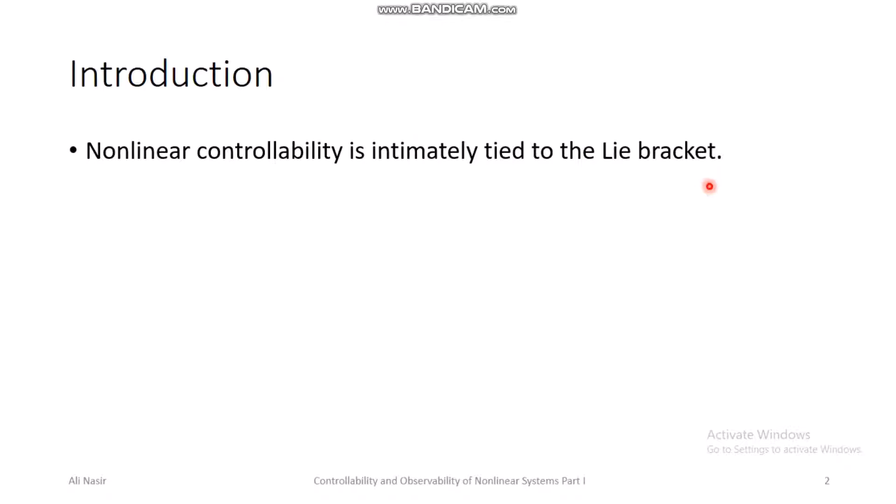Today we are going to discuss controllability and observability for nonlinear systems, and let's get started. The controllability of nonlinear systems is tied to the concept of Lie brackets. Before we discuss controllability of nonlinear systems, we shall go through this concept of Lie brackets and see how a Lie bracket is defined.

Lie bracket can be thought of as a derivative of a vector field with respect to another vector field. The exact definition of Lie bracket would come later on in this lecture, but the concept is that it is a vector field, the derivative of a vector field with respect to another vector field.

Nonlinear observability is tied to the concept of Lie derivatives. A Lie derivative is basically the derivative of a scalar function along a vector field. We shall see what Lie derivative is and how we define it before we discuss the concept of observability for nonlinear systems.

The whole discussion of controllability and observability will span more than one session. In this session we shall be discussing only the controllability part, and in the next session we shall discuss observability for nonlinear systems.

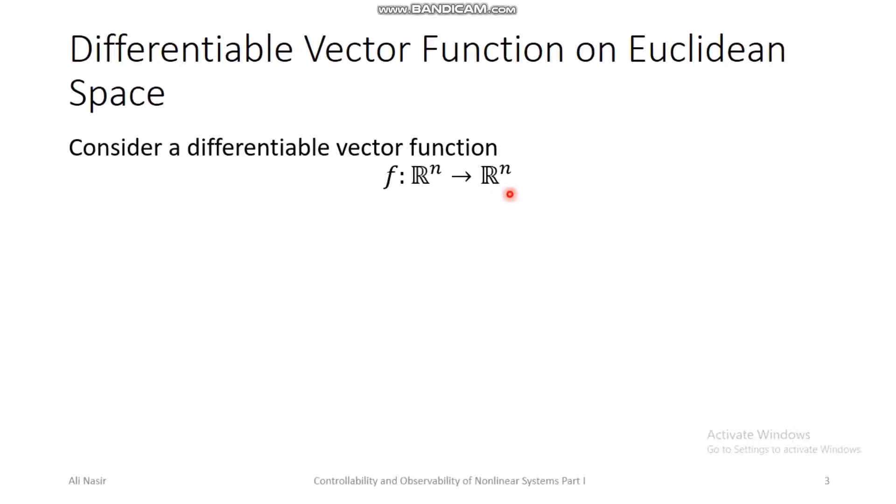First, let's look at a differentiable vector function on Euclidean space. Consider a differentiable vector function f, which is a function from Rn to Rn, meaning f operates on an n-dimensional vector, and the result of applying f to an n-dimensional vector is also an n-dimensional vector. Such a function forms a vector field over a set of points x belonging to Rn.

I am not going to go over the definition of a vector field in this section. You can look at it in the lecture notes I have provided regarding the first couple of lectures of nonlinear control systems, and you can also refer to the definition of vector field using online search. It's a pretty simple concept.

Basically it says that whenever you add these types of functions, the result of the addition should also be the same type of function. So vector addition and scalar multiplication does not alter the class of functions. If a function from Rn to Rn is added to another function from Rn to Rn, and the result of the addition is yet another function from Rn to Rn, then this is one of the requirements of a function belonging to or forming a vector field.

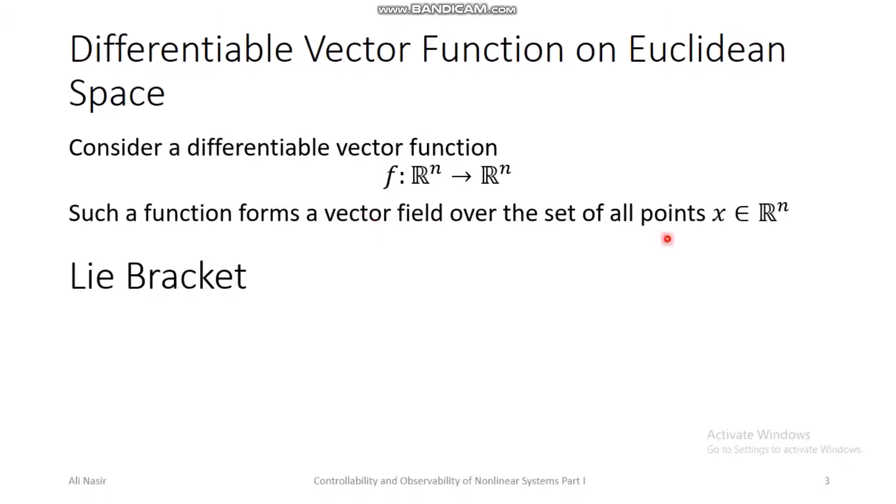So what is a Lie bracket? Once you understand that this function f forms a vector field over the n-dimensional Euclidean space, consider two vector fields f(x) and g(x) on Rn. Then the Lie bracket operation generates a new vector field which is defined by f comma g.

This is like a bracket notation, and it is defined by the partial derivative of g with respect to x multiplied by f of x, minus the partial derivative of f with respect to x multiplied by g of x.

This definition is not very complicated. You have two vector functions of x, and you take the derivative. The derivative of a vector with respect to another vector is a Jacobian matrix. So you calculate the Jacobian matrix of g with respect to x and multiply this Jacobian matrix with the vector f of x—matrix multiplied by vector gives a vector.

Minus another Jacobian of f with respect to x multiplied by g of x, which will also be a vector. If you subtract one vector from another, the result is still a vector, and this vector will be a function of x belonging to this class of functions. So it will still be a vector field, a function belonging to the same vector field.

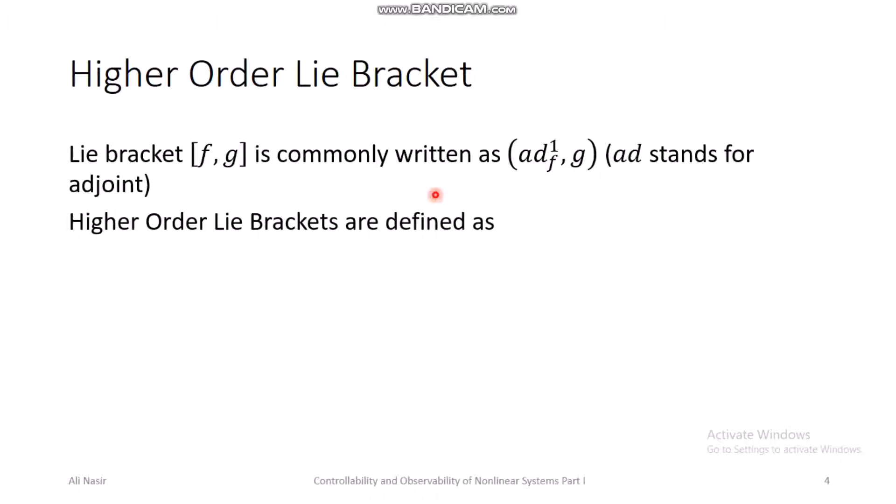For example, before I go into higher order Lie brackets, I want to let you know that this bracket of f comma g can also be written as the adjoint of f with respect to g, where AD stands for adjoint. If you look at higher order Lie brackets, the zeroth adjoint of f with respect to g is g itself.

The first adjoint of f with respect to g is the Lie bracket f comma g, which we defined in the previous slide. Then the second adjoint would be the adjoint of f with respect to the first adjoint of f with respect to g.

So this will be f, Lie bracket of f comma g. If you take the Lie bracket of this thing, that will be a second order Lie bracket, and you can continue in this manner up to whatever order k you want. That will be the Lie bracket of f with the Lie bracket of k minus 1 adjoint of f with respect to g. So in this way one can define the higher order Lie brackets, and we will also look at some examples by the end of this lecture.

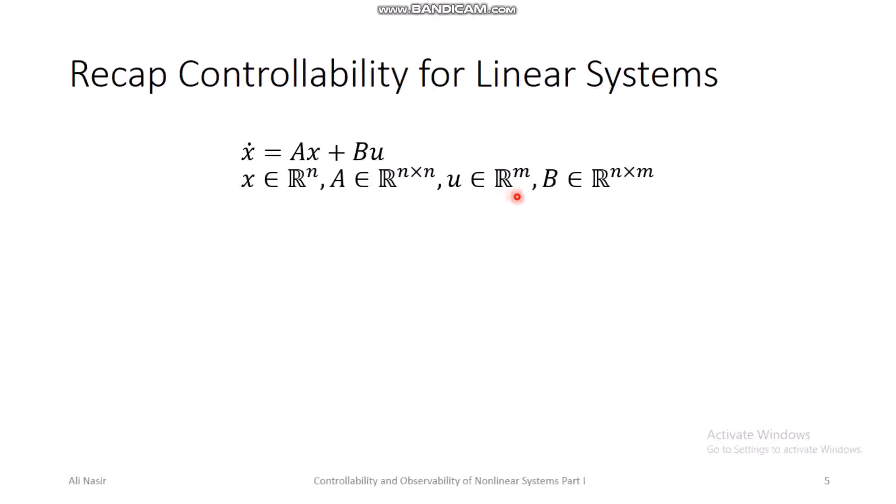Now that we have discussed what the Lie bracket is and how we define it, we can start our discussion on controllability. But before discussing controllability for nonlinear systems, I want to recap controllability for linear systems. We already know that for a linear system of the form x dot equals ax plus bu, where x belongs to Rn, a belongs to Rn cross n, u is an m cross 1 vector in general for multiple input systems, and b is Rn cross m.

For this type of system, we have a controllability matrix Q: b, ab, a squared b, and so on up to a to the n minus 1 times b. So this is n rows. This is the first m columns of the Q matrix, then the next m columns, then the next m columns. So the number of columns in the Q matrix in general is n multiplied by m.

But for controllability, all we need is for Q to have full rank. The number of rows in Q is n, and n is smaller than n multiplied by m. So the highest possible rank of the Q matrix would be the minimum of the number of rows and the number of columns. In this case, the number of rows is less than the number of columns, so the highest possible rank of Q could be equal to the number of rows, which is n.

So if Q has rank n, then we would say that this system is controllable, and if Q has rank less than n, then we would say this system is not controllable. So this is controllability for linear time invariant systems.

Next I want to rearrange a few things. I want to define a bit of new notation for these linear systems, so that when we transition to nonlinear systems, it might help in understanding the concept of controllability for nonlinear systems.

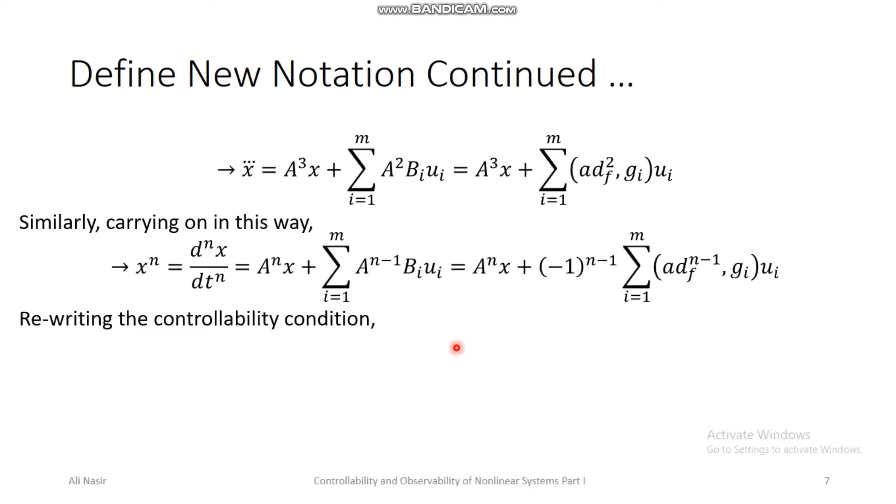So what is the purpose of writing all of this? The only purpose is to show you that the span of the higher order derivatives of x has something to do with the Lie brackets. So if we write the controllability condition for x dot equal ax plus bu in terms of fx and gx and Lie brackets, then it will turn out to be something like this.

So the Q matrix starts with B, then there is A into B, which is the first Lie bracket. So remember, the first Lie bracket is A into B.

The plus or minus sign does not change the rank of the Q matrix, as you can know from matrix theory. And the higher order terms, like the n minus 1 Lie bracket of f with respect to G1 up to Gm, would correspond to A to the power n minus 1 times B.

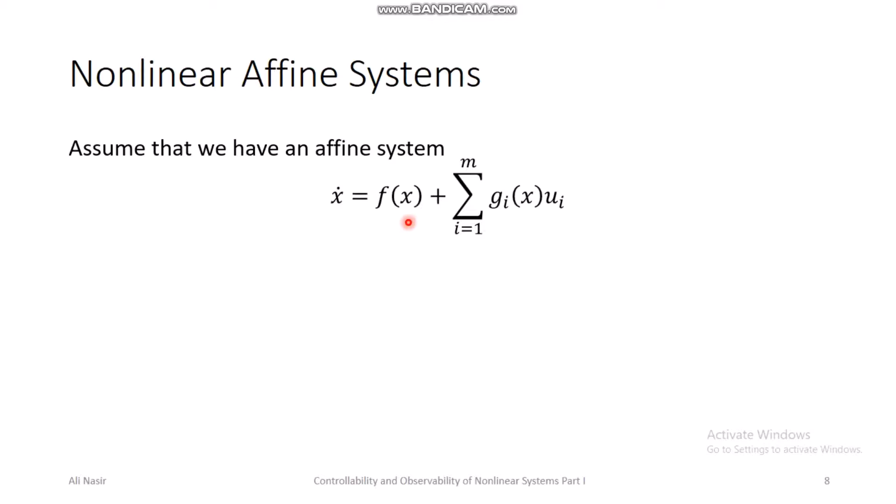You can look at Q and see that this is the same as the linear case, but the difference is that here G1, G2, G3 would not necessarily be constant column vectors. Those would in general be nonlinear vector functions of x.

So there will be G1, G2, up to Gm, and then there are Lie brackets between all possible pairs of G: Lie bracket of G1 with G2, G1 with G3, G1 with G4, and so on. Then there are higher order Lie brackets of G with respect to other G's. And then there are Lie brackets of f with respect to G, and higher order Lie brackets of f with respect to all the G's, and it keeps on going.

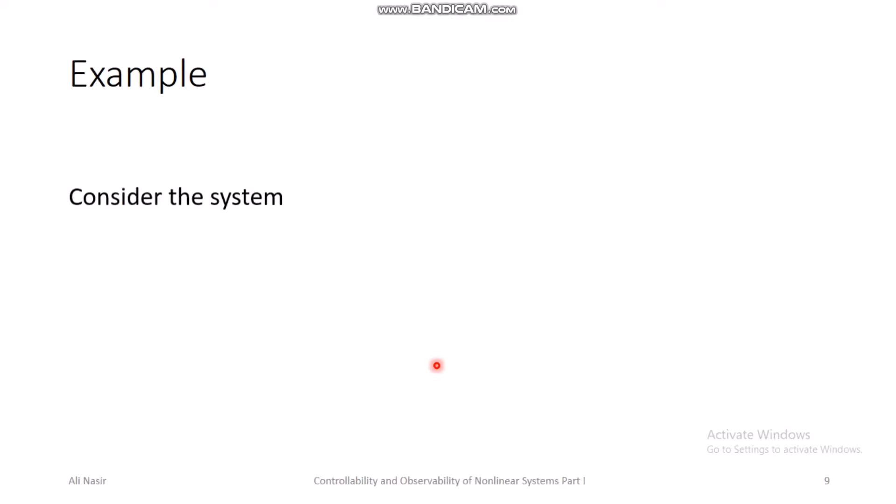Okay, so let's look at some examples. Consider this third order system, a 3-state system.

You have x1 dot equals sine of psi into u1, x2 dot equals cos of psi u1, and psi dot equals u2. So this is you can think of it as a robotic arm, the joint of a robotic arm, and there are two inputs. One input is going to rotate the xy coordinates of the arm, and this could be the torque related equation.

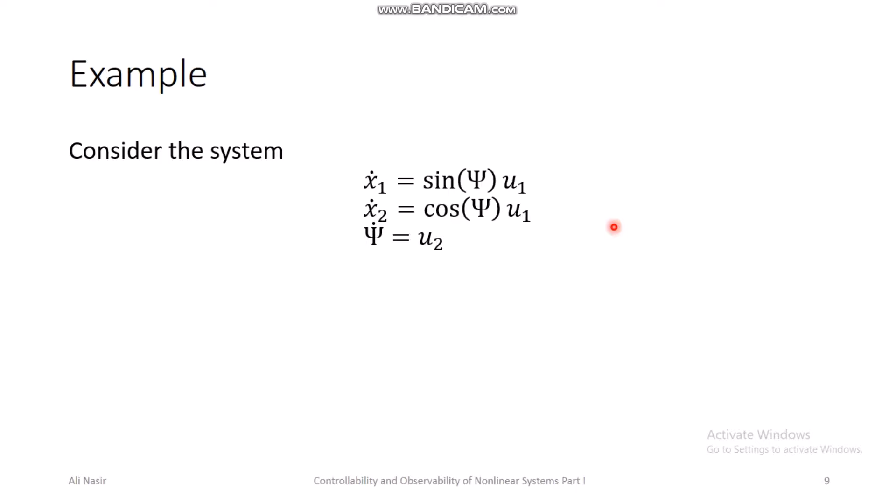So this system is basically of the form x dot equals f of x plus g1 times u1 plus g2 times u2. How is this system of this form? Let's see. Consider x to be a vector of x1, x2 and psi. So this whole thing is x dot, and f of x would be 0, 0, 0. So we have x dot equals 0 plus g1 times u1 plus g2 times u2, where g1 would be sine of psi, cos of psi and 0. In the x1 dot and x2 dot cases, g2 is 0. But in x3 dot, g2 would be 1, whereas g1 would be 0. So you can relate this form with the given example.

So given this system where we have x like this, f of x equals 0, g1 and g2, how do we form the Q matrix? It's very easy. You just have g1 and g2, and then the bracket between g1 and g2. You don't need any other higher order brackets because you only need Q to be of rank 3. So if these three are enough to prove that Q has rank 3, then we don't need higher order brackets of g1 and g2. But if these three are not enough, then we can try to look into higher order brackets and see if there is any possibility. In general you will know this without much effort.

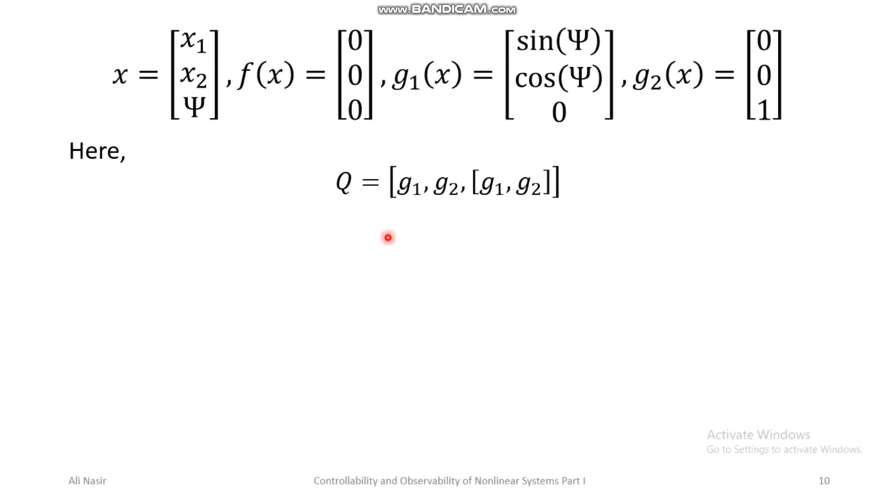So let's see what Q turns out to be. We already know g1 and g2. This is the first column of Q, this is the second column of Q, and we are looking for the third column of Q, which is the Lie bracket between g1 and g2. The definition of Lie bracket would be partial g2 by partial x into g1 minus partial g1 by partial x into g2.

You can see that whatever the value of psi you plug in, this matrix will always have rank 3. So Q matrix has rank 3 for all x, which means that at every point x0 it is accessible, and so this system is controllable. We already saw that f of x in this case is 0, so its accessibility would imply the controllability. So this was the first example where the nonlinear system turned out to be controllable.

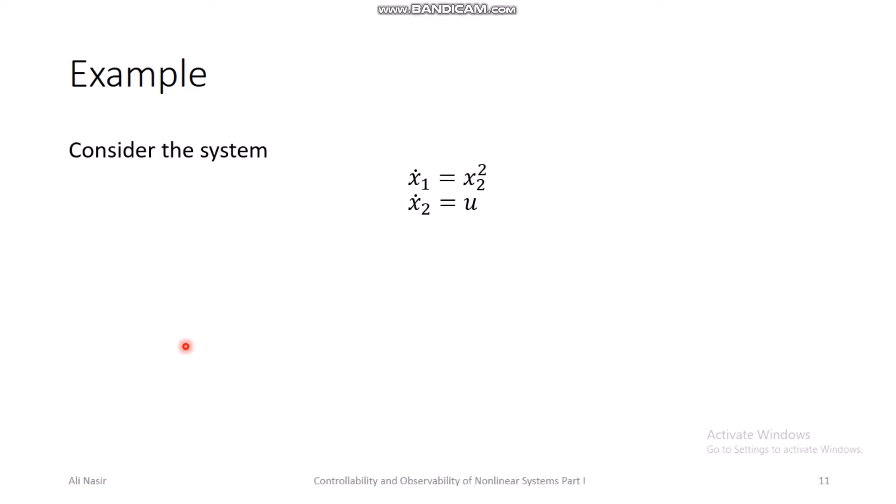Let's look at another example. Consider the second order system where x1 dot equals x2 square and x2 dot equals u. In this case f of x would be x2 square and 0, and g would be 0 and 1. So there's only one g, this is a single input system, so we can see that the Q matrix would become g and the bracket of f comma g.

We don't need to use the higher order brackets of f comma g unless these two brackets fail to get Q a rank of 2. If these fail, or in general, you will see that the higher order brackets will turn out to be 0 as well. So Q will almost never have an infinite number of columns, only as many columns as the size of the state space would suffice to determine the controllability or accessibility. We already know g here, it is 0, 1, this is the first column of Q.

We only need to calculate f, g, which you can easily calculate using the definition of Lie bracket, and it will turn out to be minus 2x2 and 0.

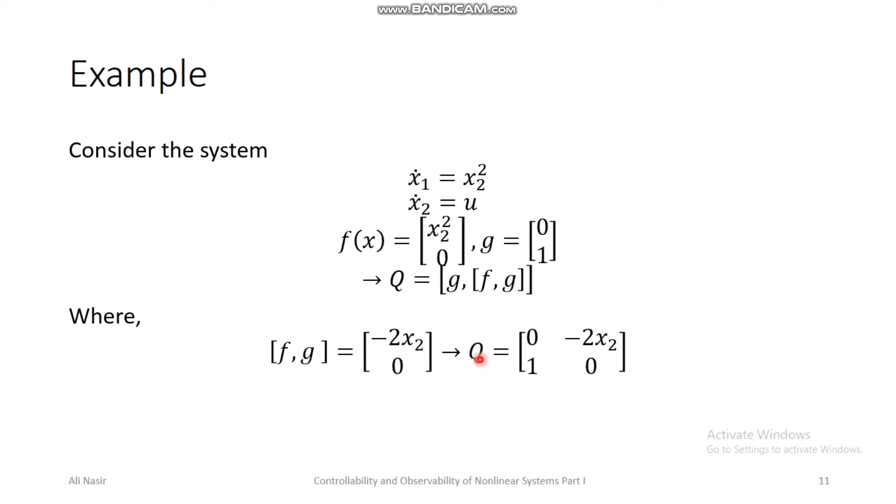If you plug it right here, this matrix would be rank 2 if x2 is non-zero. If x2 is 0, this whole column will become 0 and the rank of Q will drop to 1. And even if you use higher brackets of f, g, this condition will not change.

So Q will always lose its rank at x2 equals 0. This means that Q has rank 2 everywhere except for the points with x2 equal to 0, and x2 is 0 along the x1 axis. So along the whole x1 axis your system is not accessible. Therefore the system is accessible everywhere except for the points on the x1 axis.

So this was another example where the system is not controllable, but it is accessible at points other than the x1 axis. So I hope that these examples and the description of the nonlinear controllability was useful in understanding the concept of controllability for nonlinear systems.

In the end, I just want to give one remark: if we linearize a nonlinear system about some point x0 and the linearization is controllable, then the original nonlinear system is accessible at x0. And we already saw in earlier lectures that if the linearization of a nonlinear system around an equilibrium point is controllable, then it is possible to design a feedback control law for the original nonlinear control system.

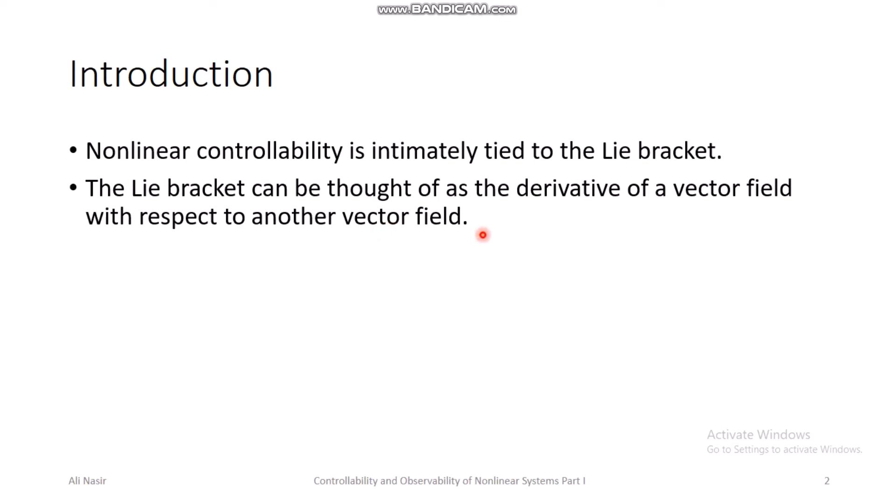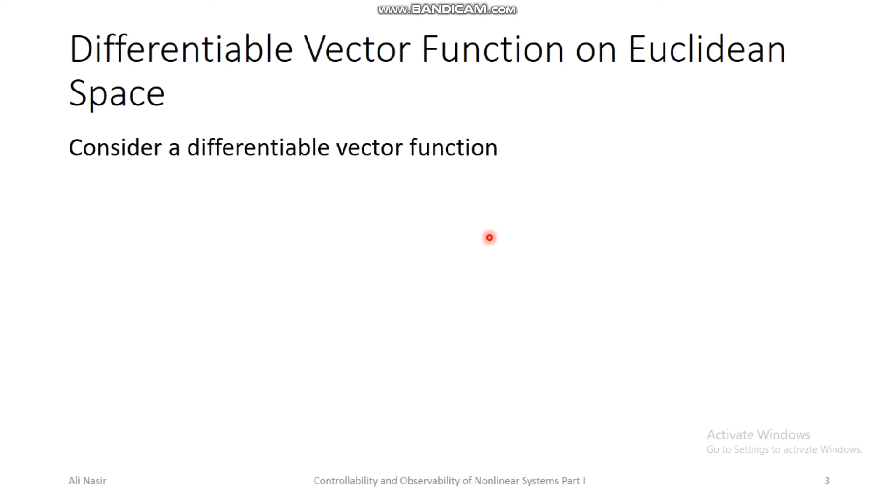Nonlinear observability, we shall discuss that next time. Then we consider the vector field f of x in n-dimensional space, and this is the Lie bracket, which is sort of similar to a derivative of a vector field with respect to another vector field. So derivative of a vector with respect to a vector is a Jacobian.

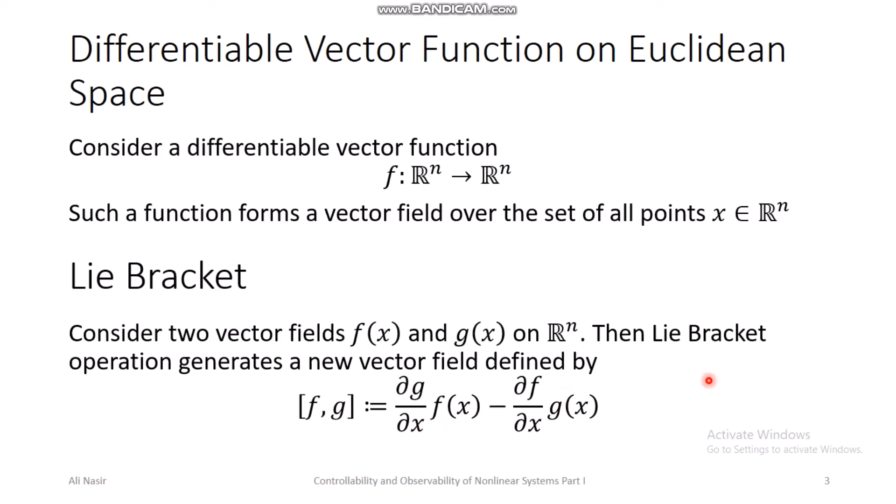So higher order Lie bracket would be similar to the Lie bracket. You take a Lie bracket and take the bracket of a bracket. So you take the bracket of f with respect to the bracket, then this will be the second order bracket. So if we take a bracket with respect to a k minus 1 order bracket, then that will be the kth order bracket.

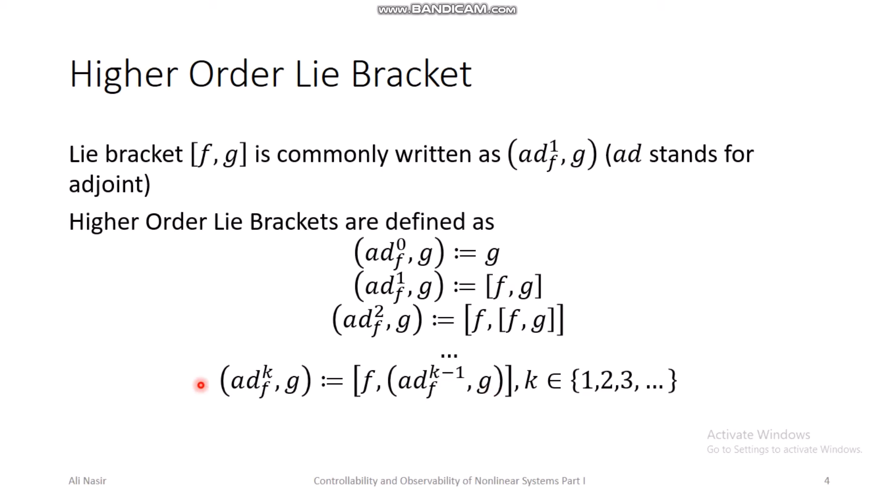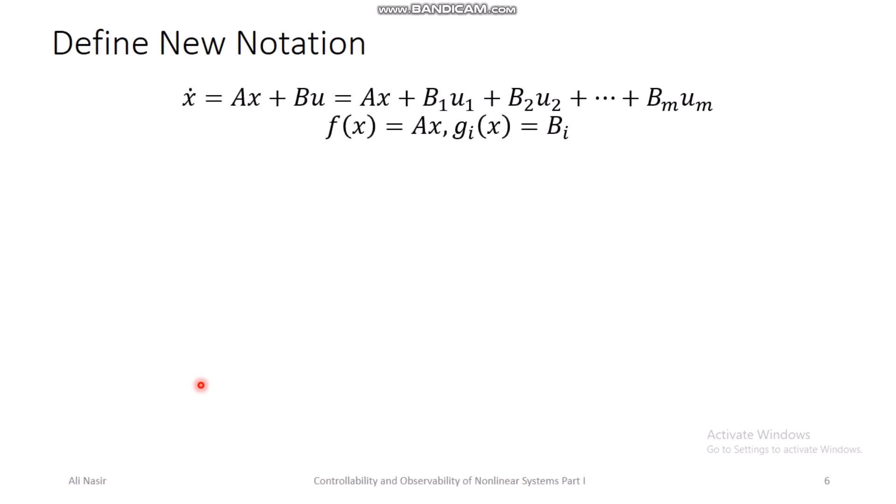Similarly, we looked at controllability for linear systems, the B, AB, A squared B matrix. This was simple. Then we redefined the notation to show you that for linear systems as well, the Lie brackets are involved in controllability. We define f of x equal Ax, g as column of B, and then the Lie bracket was A times B.

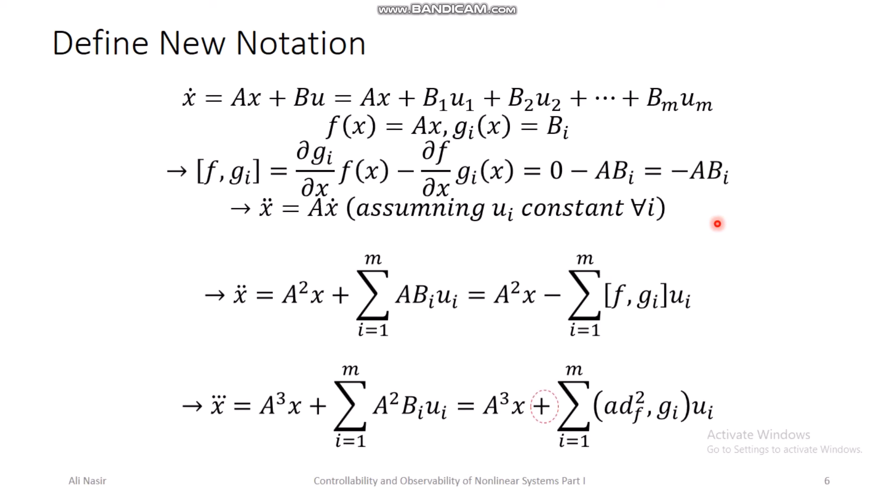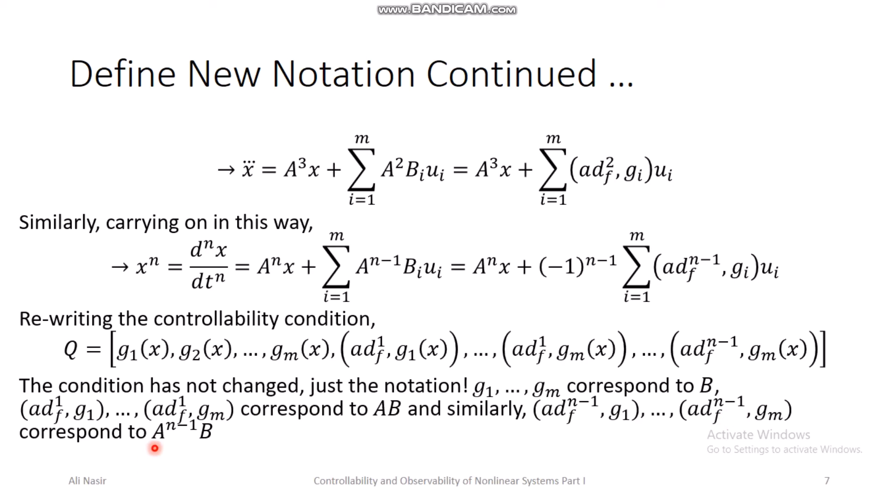Higher order Lie brackets would be higher order powers of A times B, and then the minus sign would toggle. And then we looked at the controllability matrix of a linear system in terms of Lie brackets, where you can see that G1 through Gm correspond to B, the first order bracket corresponds to A times B, and the n minus 1 order bracket corresponds to A to the power n minus 1 times B.

And then we discussed the nonlinear system's local accessibility condition, and then we looked at the special case where controllability is implied.

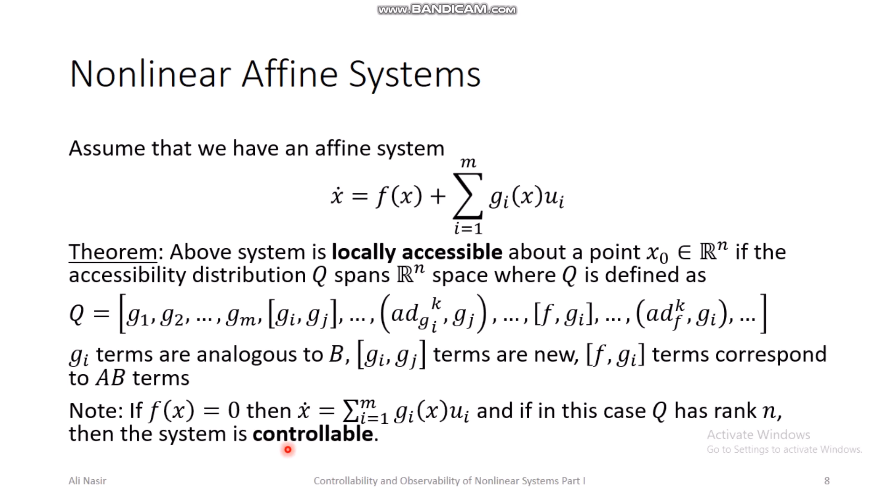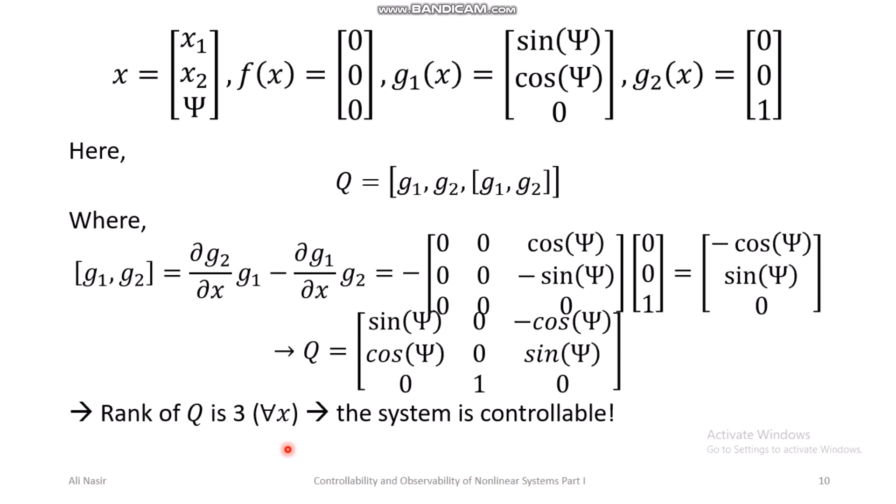And then we looked at a couple of examples, a third order example where we had G1 and G2, and then we calculated the Q matrix. We just considered the first three terms, and it turned out to be full rank, so we don't have to consider the higher order brackets.

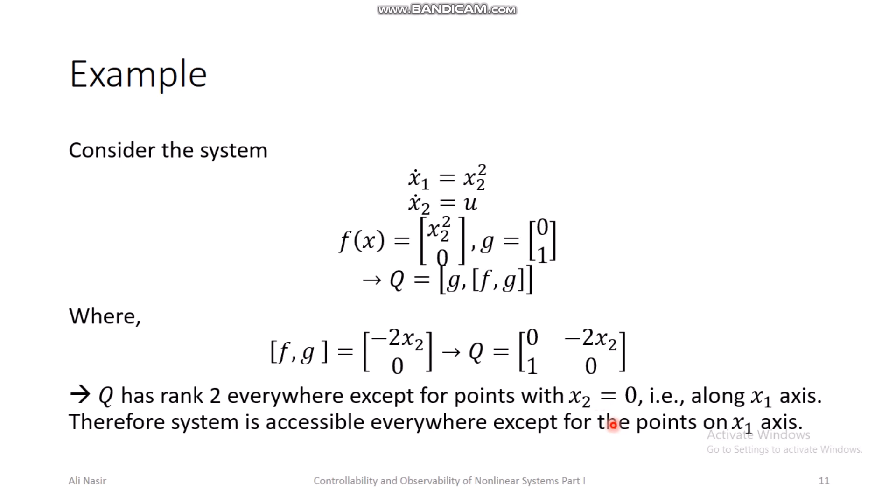Same here, we don't have to consider the higher order brackets, and it turned out to be locally accessible everywhere except for the points where x2 is 0. And then finally a remark that if the linearization is controllable, then the nonlinear system is...